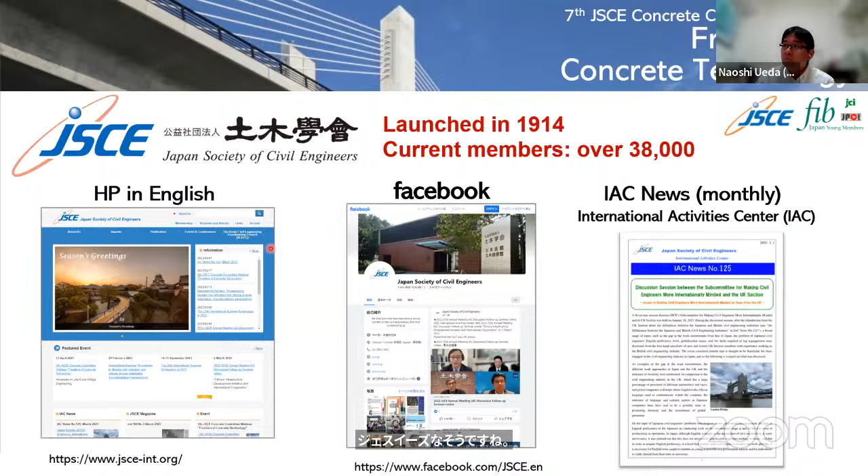JSCE has several research committees. The Concrete Committee, to which we belong, is one of these research committees. This webinar is one of the activities organized by this committee. The most important activity of the Concrete Committee is to publish the standard specification for concrete structures. The latest version was published just last year, and part of the specification has been translated into English.

Currently, you can freely download it from the Concrete Committee's webpage. The Concrete Committee is also focusing on international activities. We issue a newsletter every month to inform about our latest activities. Moreover, we hold an international web seminar every year, primarily with Asian countries. This year, we are planning a seminar in Laos.

As I mentioned before, today's webinar is our 7th webinar, meaning we have already had 6 webinars up to now. You can watch the past webinars on YouTube. Please search for JSCE and Frontiers of Concrete Technology if you are interested.

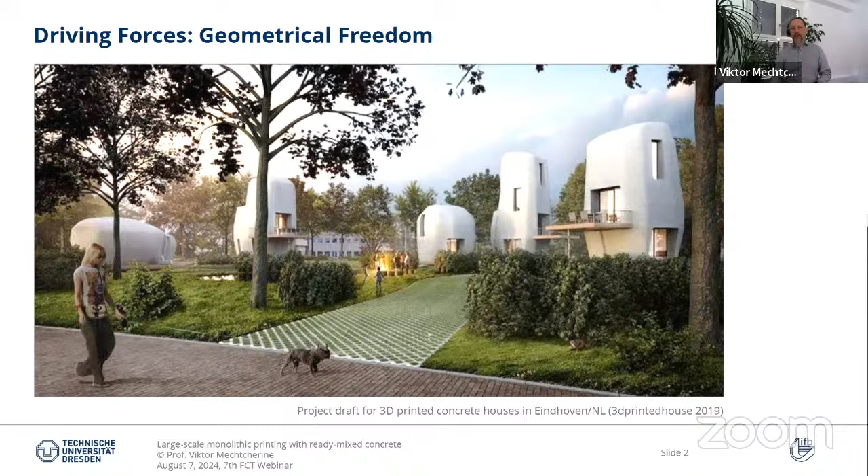Using this technology, we can produce pretty complex geometrical forms without much additional effort, which in case of casting is not feasible. So the second point is we can use this geometrical freedom also to optimize topology, following the principle form follows force, and spare material.

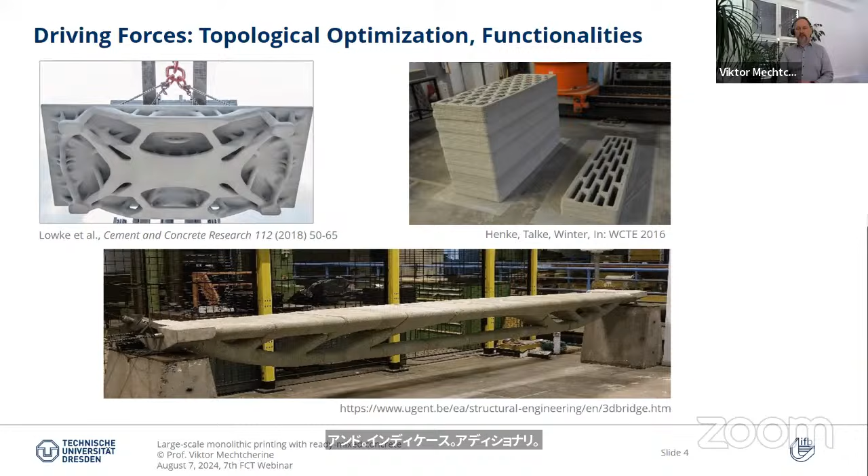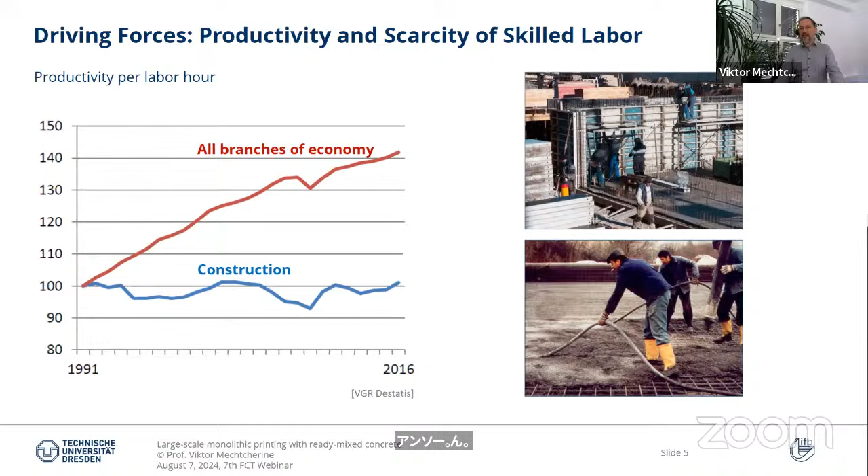The next point is about productivity, and this is even more important. In most countries, productivity in construction is stagnating. In other branches it's developing pretty fast, but in construction it's more or less on the same level as in the last decades, mostly because of the high portion of manual labor. We also have less and less skilled labor on the construction site, so it's difficult to find replacements for people who retire.

So it's additional motivation to use robots and machines. Given that the price for such robots goes down while salaries for labor go up, the motivation is increasing, so we're interested in using this technology more and more, also from the economical perspective.

I believe it's much more efficient to send this data from planning directly to the machine, from digital planning directly to digital fabrication without any loss of data. It would also make the entire process more robust and efficient.

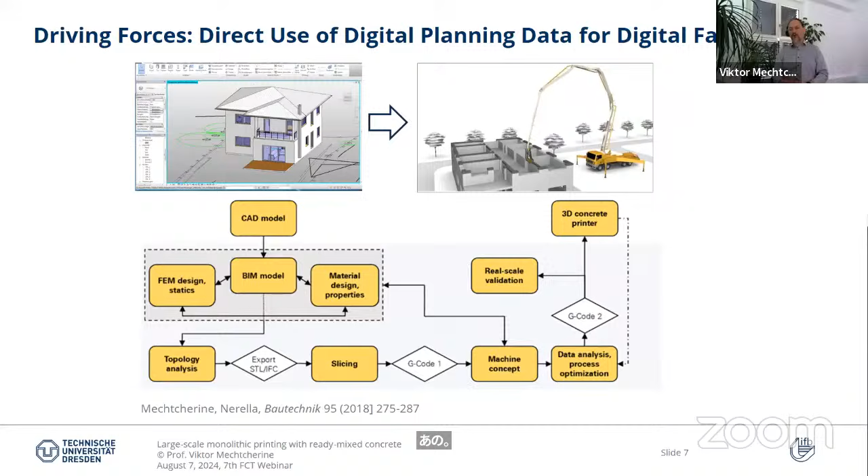So this was a little introduction, and now I want to address one of the technologies widely used in 3D printing nowadays: extrusion-based concrete 3D printing. We use extrusion as the key component for shaping the filaments. There are other techniques as well, like spraying, but today I'll concentrate only on extrusion-based printing because it's the main technology.

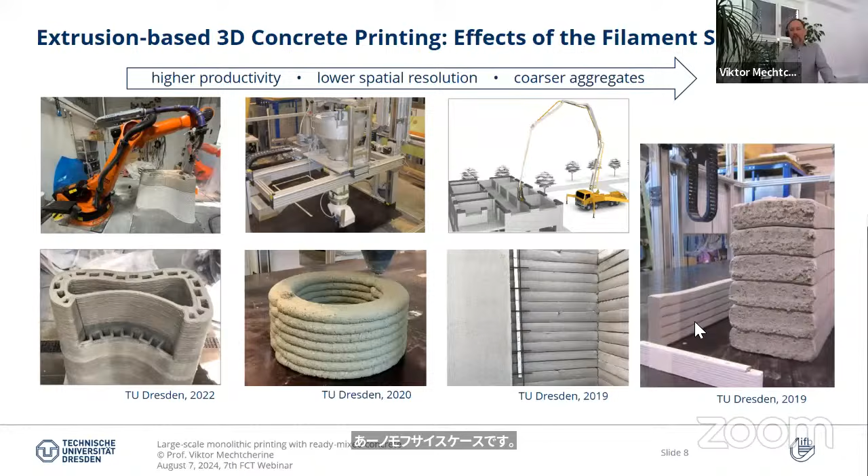Good, so recognizing these benefits, we suggested already a couple of years ago an approach we called Conprint 3D. Conprint 3D stands for on-site monolithic 3D concrete printing. We offered this approach during Bauma in Munich, the largest fair for construction machines worldwide, and we were awarded an Innovation Award.

The idea those days wasn't much of an idea yet—we hadn't built a machine. It was just a concept, but a pretty sound one. I'll show you that nowadays it's also implemented, so indeed we have applications of this concept in the practice of construction.

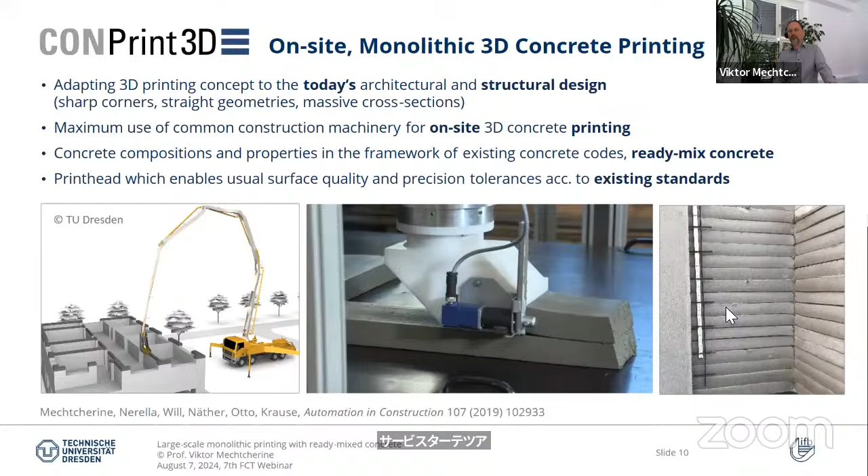On the other hand, we want to use to the maximum extent the machinery which exists already, and we want to print on site and not in the factory. Another important point is we want to use ready-mix concrete, which spares costs and links to existing standards. So you see here some scheme as we started our thinking process, and the first printed element in our lab.

We have here a little video. I hope that it works.

So this was a presentation of this concept during the fair, and you see it's still quite schematic, but basically the most important points are shown here: it's at a large scale, it's on site, and it's using existing mobile pumps.

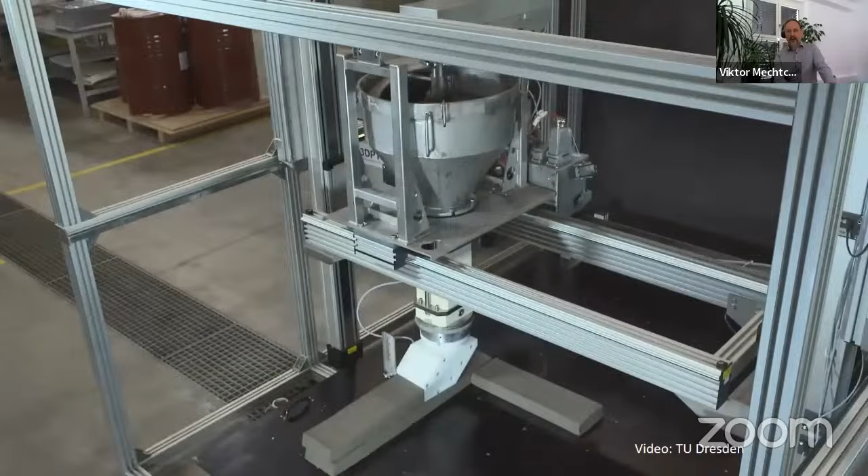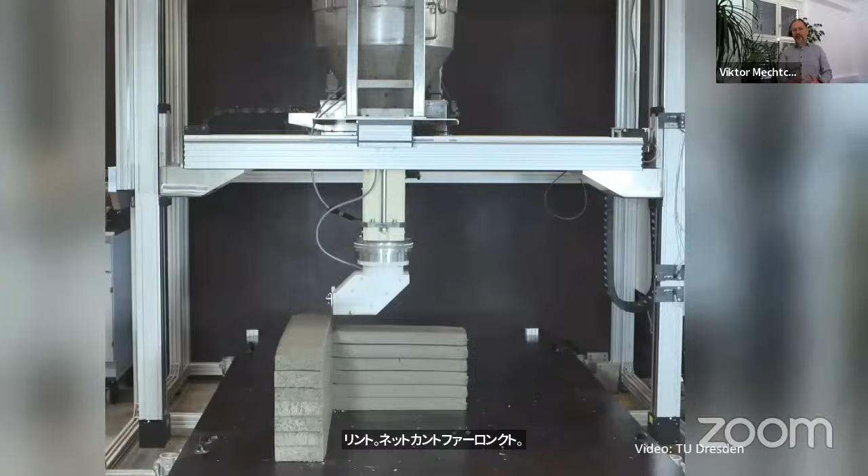And then we follow this concept. So we built a large print head and installed it first in our lab on a gantry system, as you see here. You see that it's a little bit different than other types of printing. It's kind of long bricks we deposit here, and we can also form sharp corners and produce a geometry similar to masonry.

So now, after showing the concept, I want to discuss with you what we need to successfully implement this concept in the practice of construction. For this, we need a material which complies with the requirements, and I will address this right away. On the other hand, we need an appropriate machine.

I addressed this mobile pump as a base machine, but it's not all. We need, of course, also an appropriate print head and maybe some other devices for steering the machine. And of course, we need software for transferring the planning data into the data we need for execution of this job on the construction site.

So let me start with requirements for concrete. Obviously, we first need to deliver concrete from the ready-mix truck to the site as such. So we use this pump, and we need to pump the material to the print head. Then in the print head, the material needs to be extruded, so it should be extrudable. But first, it needs to be pumpable.

Extrudability implies that we have a particular deposition rate of the material, which is also arranged in a way that it complies with the printing speed and movement speed of the print head. And when material is deposited, we want, after a while, to deposit another layer and another layer. This is what we call buildability, so that material which is earlier deposited can carry the load of subsequent layers of material which come after.

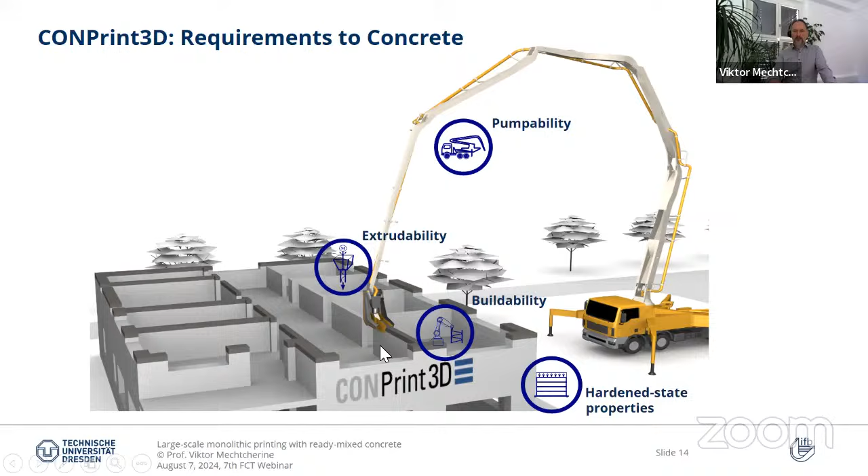And finally, when the structure is printed, we of course also require some properties in the hardened state according to standards, and I will address this as well. So let me start with pumpability.

Here it's very important to understand that we actually have a very complex process. The complexity is defined, first of all, by the heterogeneity of concrete. So when we push concrete in the pipe, we have some segregation. We have formation of a thin lubrication layer, as you see on the walls of the pipe. The properties of this lubrication layer define the resistance of concrete against moving in the pipe and also the energy we need to apply to let the material move.

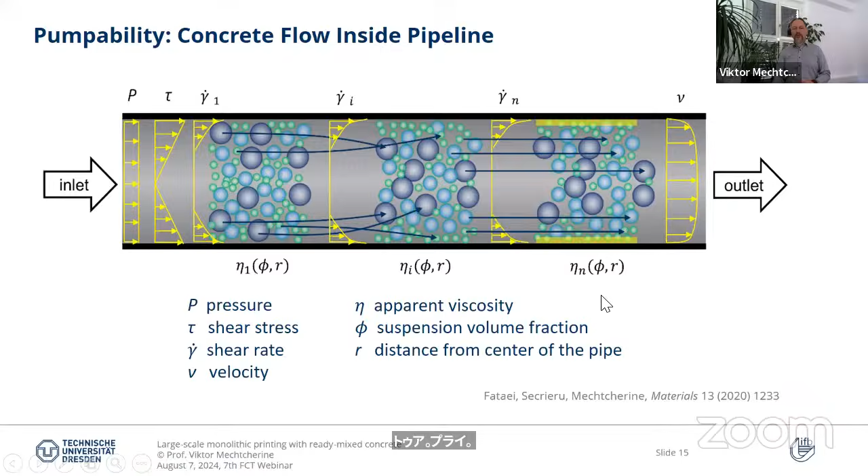For this reason, we need to actually characterize the material, and then when we have these values, we can also predict what pressure we need to apply in the pipeline to achieve a particular flow rate in the pipe.

Then we measure the resistance to this sliding by installing a sensor in the lower part of the device. We can change the weights we apply to the pipe, and we can also change the speed of the movement. So we can get a relationship between flow rate and pressure from this experiment.

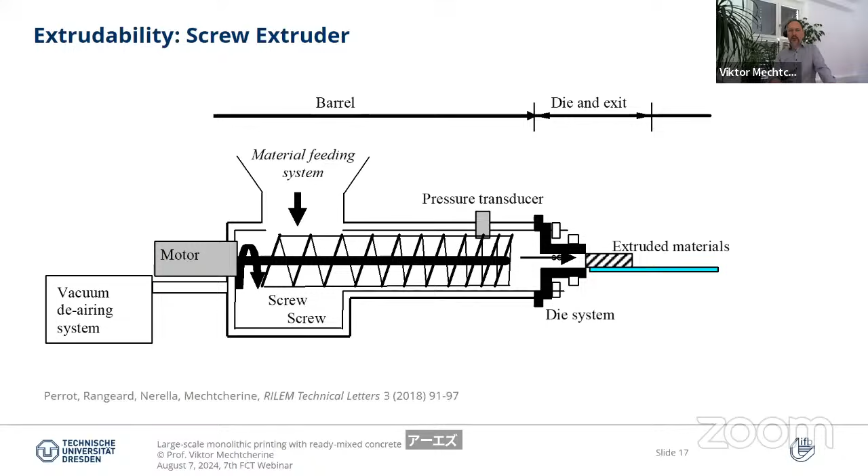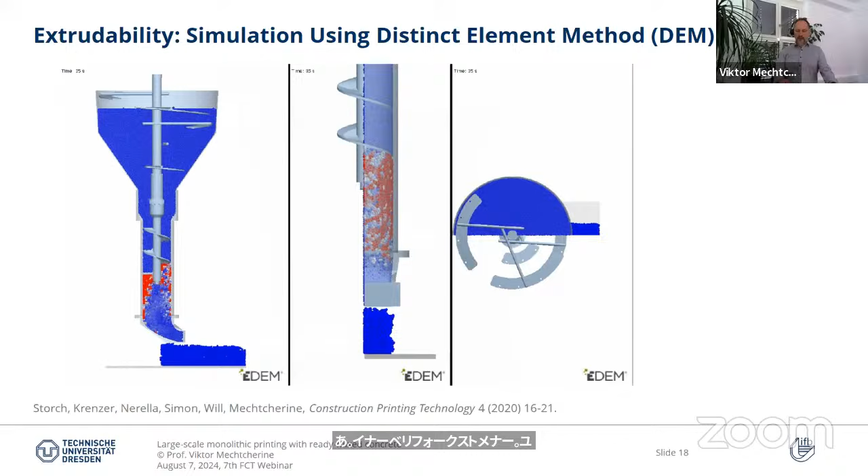So what we do to gain more insights, we go into numerical simulation. We use distinct element methods, which is very appropriate here. And you see from this simulation that we can look inside this kind of print head and see some unsteadiness maybe in the flow or some concentration of forces. This helps us to develop in a very focused manner new designs of the print head, but also adjust the rheological properties of the material we want to print.

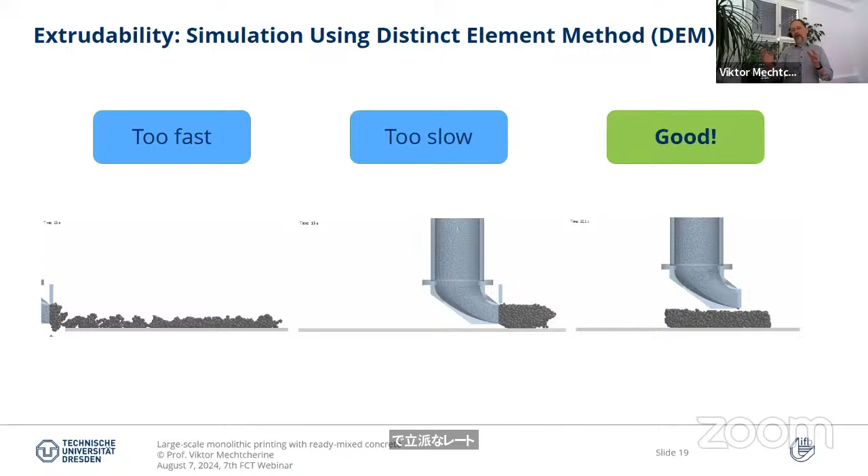So I have here an example where different deposition rate is shown. Actually the flow rate of the material is the same, but the print head moves with different velocity. And you see here what I mentioned before, that it's very important to adjust the deposition rate of the material to the speed of the movement of the print head.

So at the end of the day, what we can suggest is that for every extruder attached to this kind of mobile pump or any other equipment you use in extrusion-based 3D printing, you best measure inline the energy which you need per unit, volumetric unit or weight unit, of concrete extruded. That's the first thing. Then you have this relationship between the extrusion rate and the energy needed for a specific device, but you also look at the quality of the concrete coming out of the nozzle. It should be a steady flow without any interruptions.

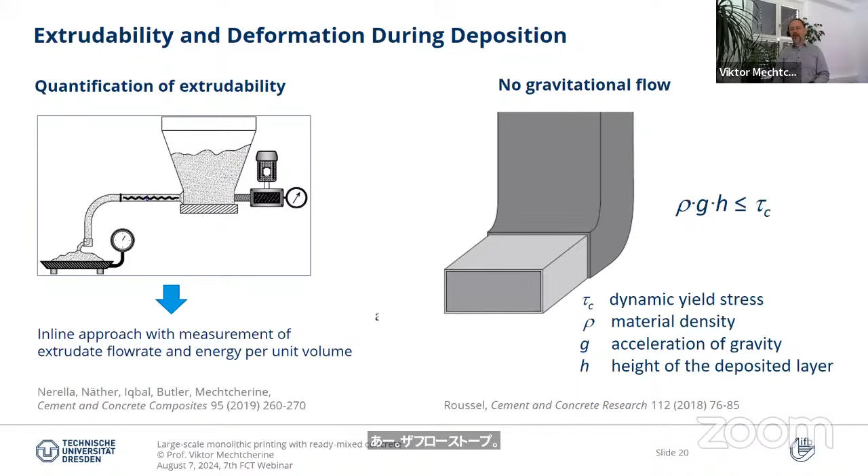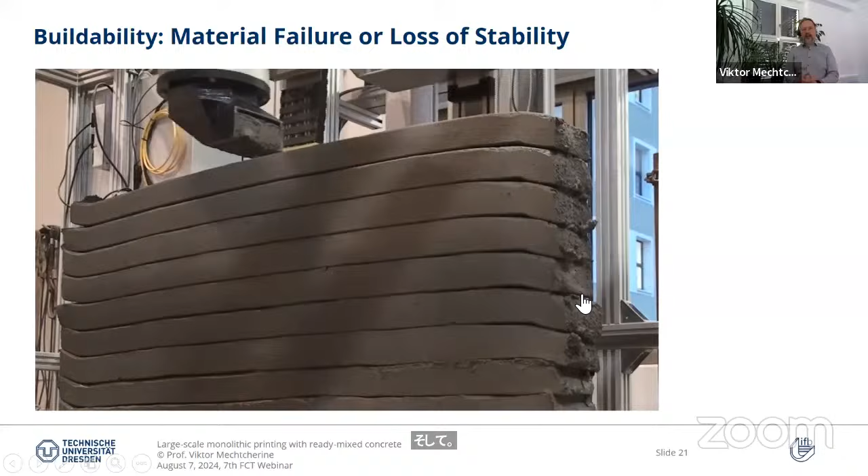You probably noticed that in our approach, we try to keep the shape of the nozzle so that we have very good control over the shape of the element, since we also use pretty large filaments in the deposition. So this is an example from the lab. In this case, it's already about buildability. So we look at what would be the limit when we place layer by layer material, and how well we can predict the failure of the material if the build-up process is pretty fast.

And this is done here, of course, on purpose. We want to see the failure so that we can check if the prediction works well. And there are two types of failure. On one hand, it can be material failure, so that the layers further down, on the lower side, are kind of overloaded by the many layers which come after.

You see that the formula is very similar to what I showed before. Just the difference is that the height here depends on time. So the height is not the height of just one layer, but of all the layers which come during the minutes and hours of the deposition.

And of course, in time, the resistance of the material will increase. So we know this concrete changes its rheological properties over time. We call it thixotropic behavior. And what you see here is an extension of this term by a thixotropy constant, and again we have time here.

So we can measure this development using different devices. Basically what we want to gain is this relationship between the static yield stress, shown here, and the age of the material after deposition. In the first hour or 1.5 hours, it's mostly a linear relationship, which is of course good. But then due to hydration it becomes non-linear in most cases, strongly non-linear, and then we need to use a non-linear relationship if we go that far.

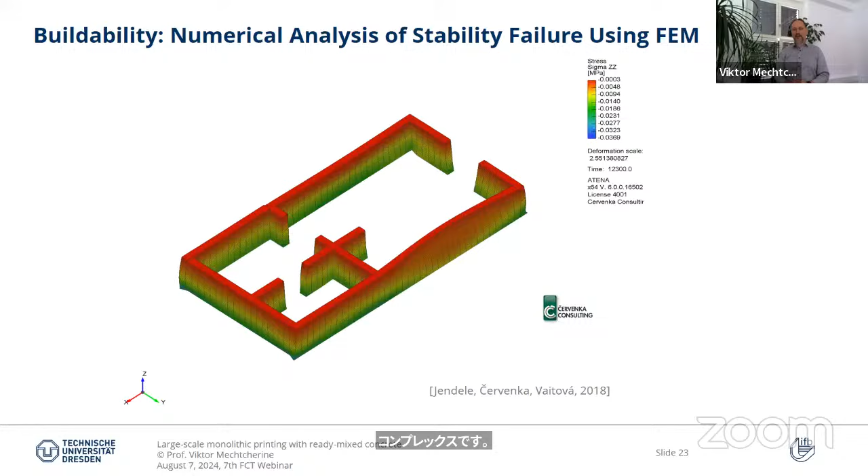So for simple elements like this kind of wall, there are analytical formulas you can use, but for more complex situations, where you have shapes which cannot be translated easily into analytical formula, then we recommend to use finite element analysis.

Now I come briefly to material design. Actually, it's not rocket science, but first of all we need to attain these rheological properties which I mentioned. And when we go to a real concrete, ready-mix concrete, we recommend to follow the approach by Andreasen and Andersen, which is sometimes also called the Fuller form or curve. It's a similar approach which enables us to get maximum density packing.

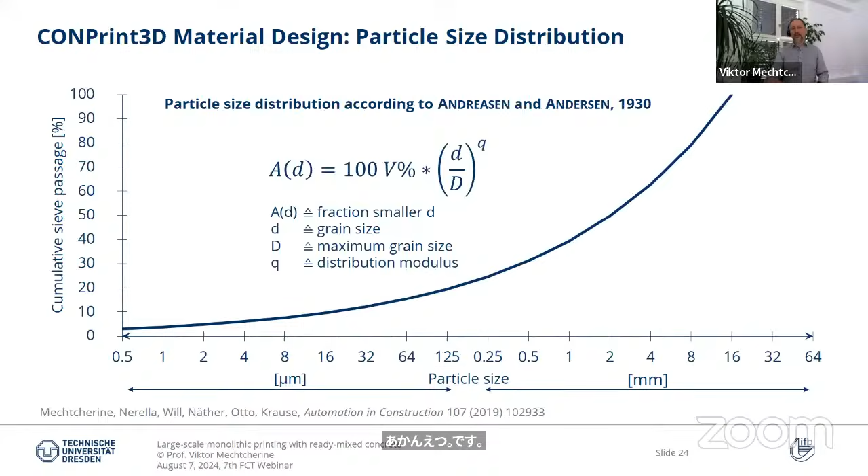And how to get it? You probably all know this. It's about choosing the ingredients for the mixture in a way so that, by applying some quantity of these different materials—and we start already with cement, not just with aggregate—and then in this case some pretty fine powder, so stone powder here, limestone powder, etc., and then we have two different sands, and then we go to larger aggregates.

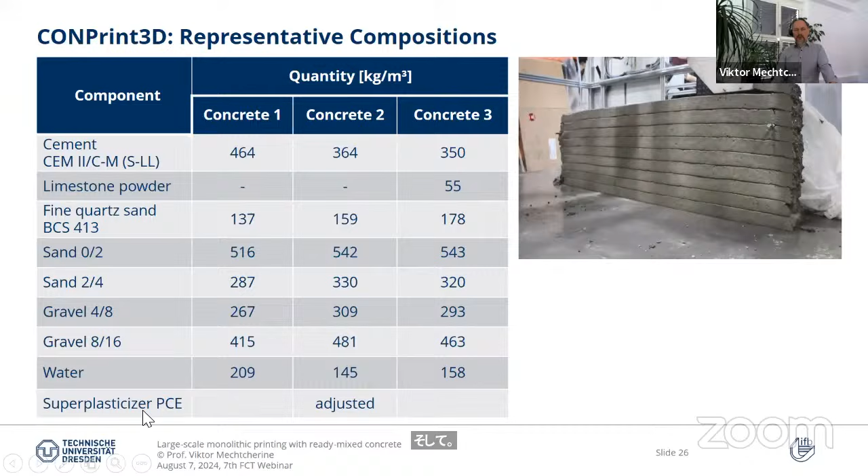You see that in this case we could match the shape of the curve pretty nicely, and this is what we recommend to everybody. In this case, we can indeed minimize the cement content while still keeping good extrudability, pumpability, and also buildability. So again, you see some examples here, and we also use some amount of superplasticizer, just to achieve the rheological properties as required.

So now very briefly to hardened concrete. When we print material, after a while it hardens, and of course we need to know what properties we achieved. In this case, it's really important to figure out in which direction we need to test. Basically, we have here some heterogeneity and anisotropy due to the joints, as you see here. So the joints are usually a little bit weaker than the rest of the material, the bulk material.

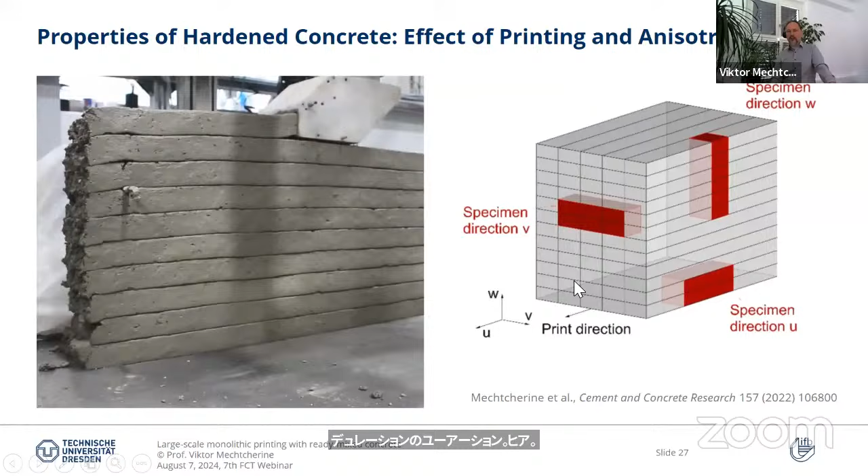And if you have many filaments deposited one aside the other, you might also need to take specimens in this direction. In this case, two directions are fine: the direction of printing, shown here as direction U, and direction W. So for these two directions, I'll show you some results.

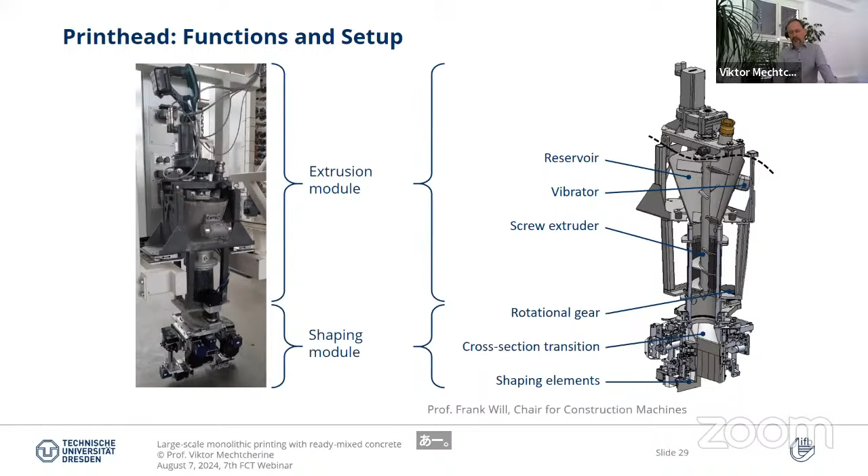Let me say a few words about the print head. You see that the print head consists of different portions. In our approach, we use a reservoir as a buffer, and we also have a possibility to vibrate the concrete a little in this reservoir so that it flows better into the screw extruder. The screw extruder delivers it to the shaping elements, which can make the filament a little wider or narrower, and we can also change the height of the filaments.

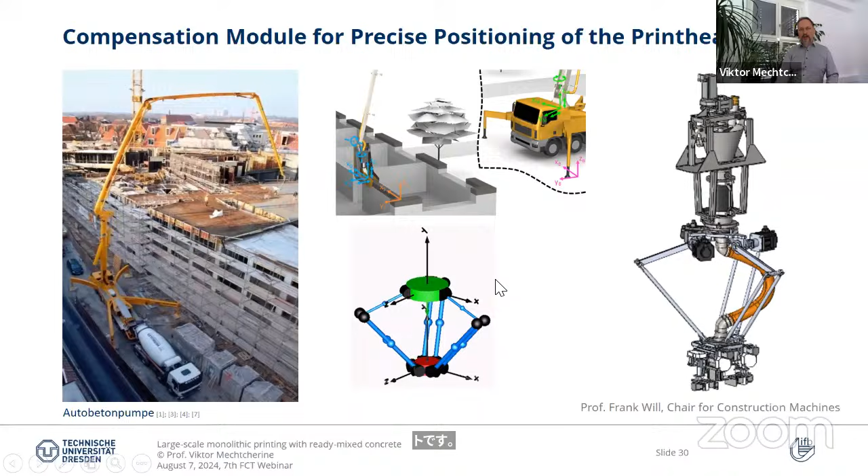A very important point is that given the large size of these mobile pumps, you can imagine, and probably know from your own practice, that it's pretty soft. So at the end of the pipe where the concrete is delivered, there's quite a large movement of the pipe due to the pumping process itself, but also due to wind, etc. So there's a need to adjust the position of the print head. This is the approach we suggested, to have some adapters which enable us to compensate for the movement of this mast.

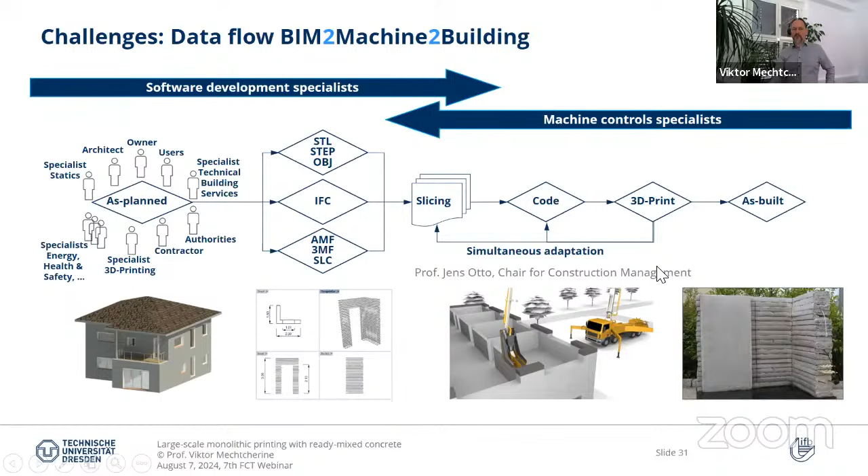This is what we are working on quite intensively now: collecting information during printing by laser sensor concerning the geometry of individual filaments, but also using photogrammetry to collect data of the printed structure. We also introduce sensors to collect even more information, for example on temperature and other parameters, ultrasonic measurement, etc. So now I come to the promised implementation of this approach in practice.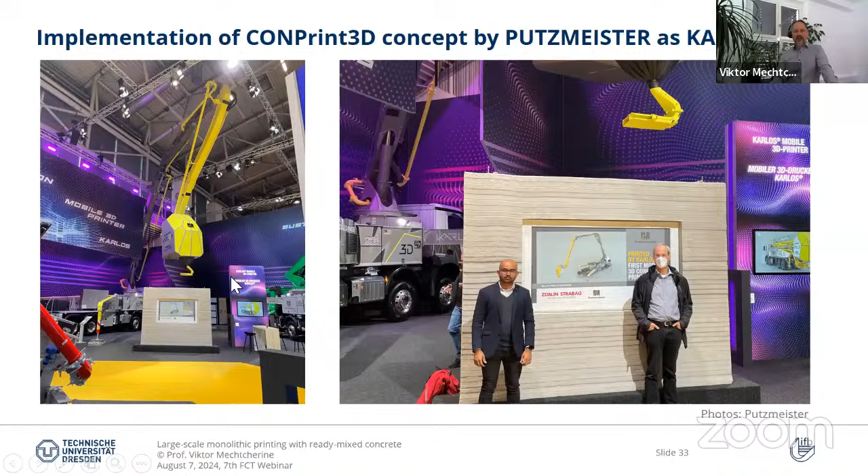We collaborate with the firm Putzmeister, a German producer of concrete pumps. This company learned about our approach, liked it, and implemented it. This presentation was last year at the same fair in Munich, where we got our award a couple of years ago. So after 6 years of working on this, they presented the machine.

And this is some data. You see quite a good outreach of the machine. The layer width can be up to 30 centimeters, layer height 6 centimeters. The print head is not very fast at the moment, but they are working on increasing the speed. There are some other parameters. Basically what you see in this box, kind of hidden, is also some adjustment—this system to adjust the position of the print head—but they don't want to show it, of course.

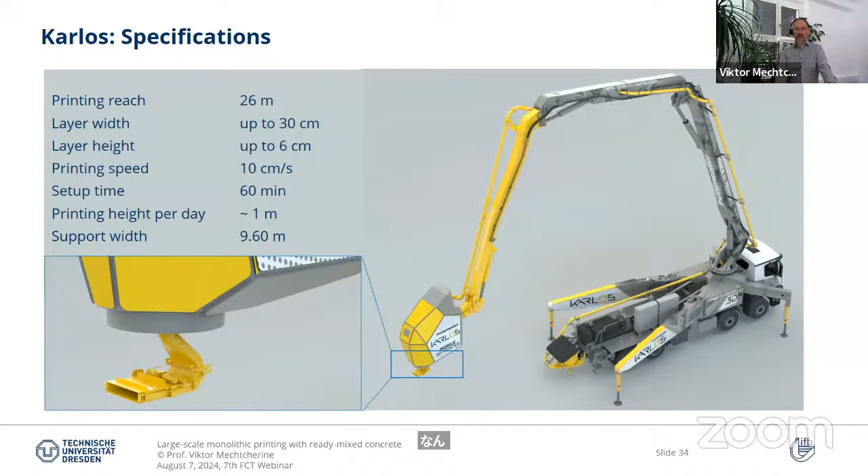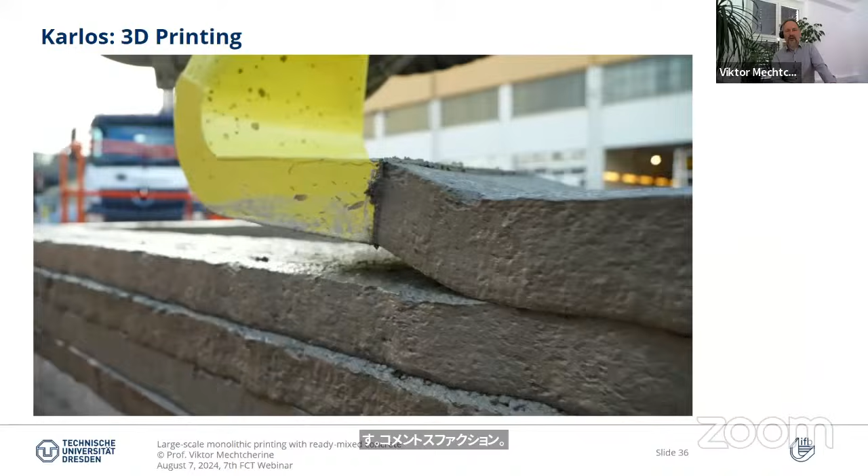This is the recent video of printing. This was the first commercial structure printed here in Germany, near Stuttgart. It was for the Züblin company.

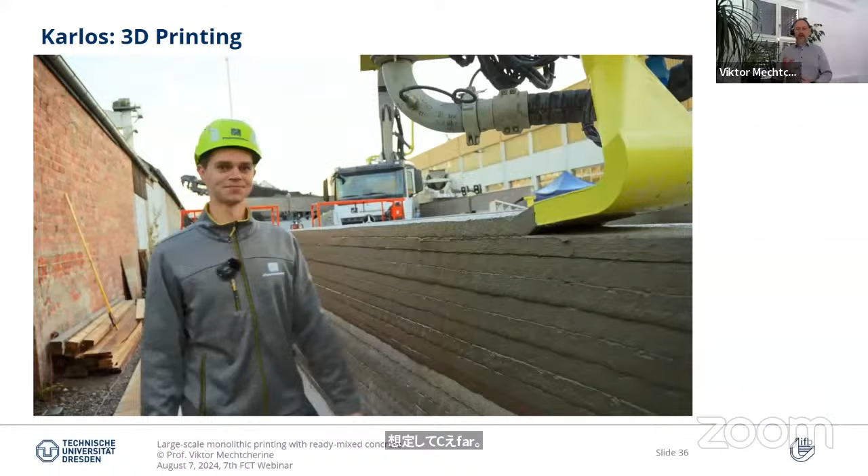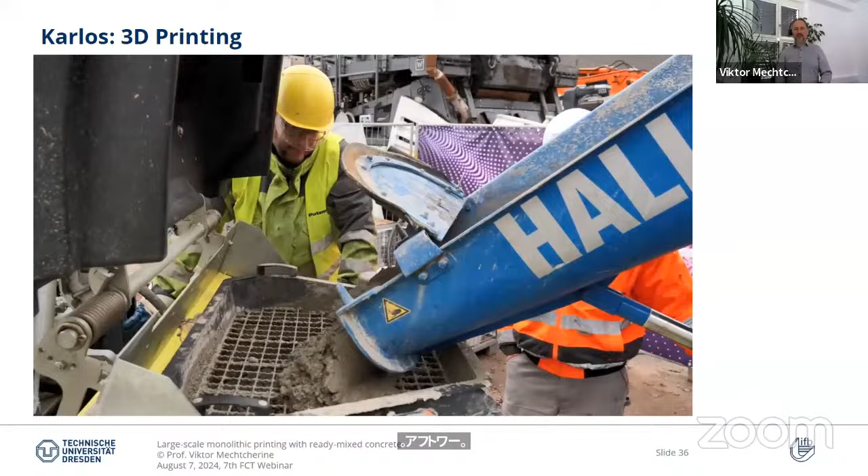And you see here a little bit of material testing, just to check if we are in the expected range. And you see how it works—it deposits layer by layer, pretty wide. After a while, the complete building is built. You see here also delivery of concrete. It works in the usual way, as if you would pump this material just into the formwork. But in this case, it's not placed in the formwork, but deposited layer by layer. This is what we call 3D printing.

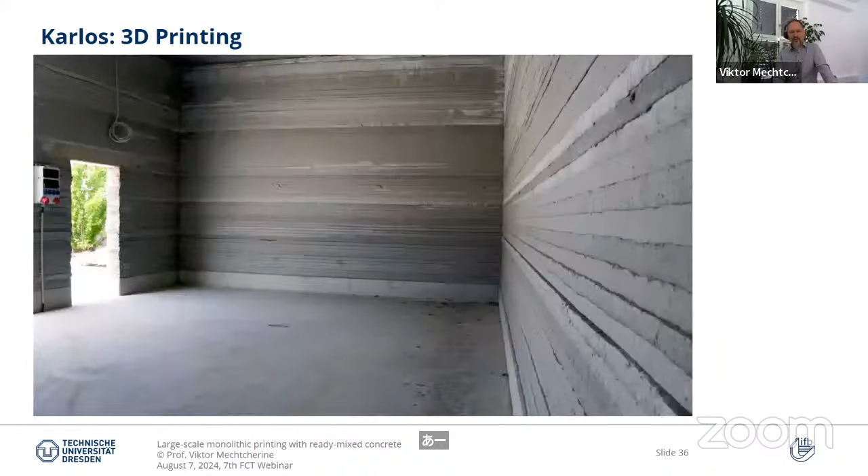So this is what was produced. It's nothing huge, but it's a considerable geometry already—6 by 10 meters in projection, and a height of approximately 4 meters.

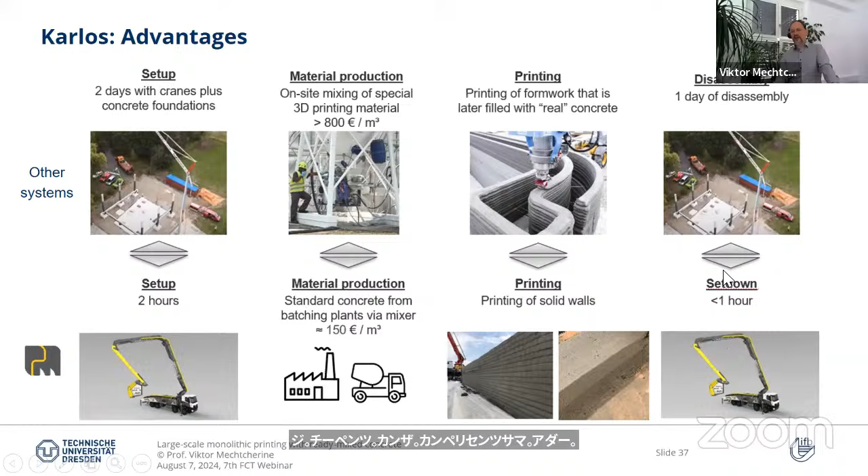Good, there are some advantages. It can be set up on the construction site pretty fast. The material is pretty cheap in comparison to some other materials offered for 3D printing. And then the printing process itself is pretty fast, and the setdown of the procedure is also pretty speedy.

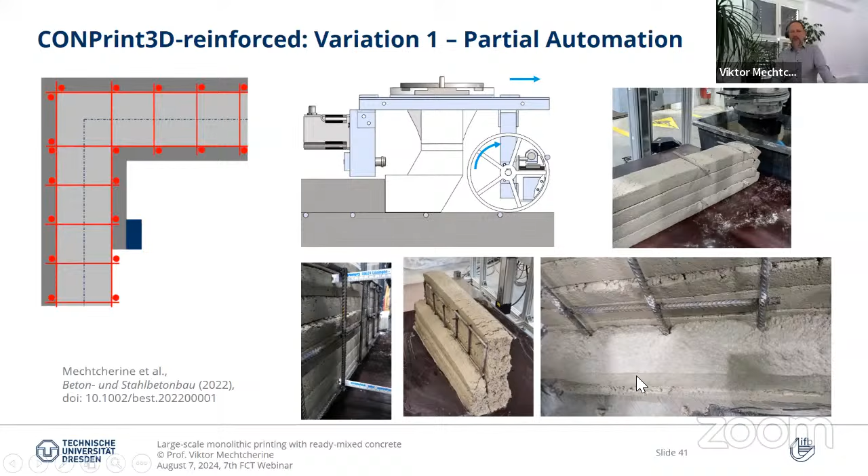We have also developed a little machine for that, and you see how it looks after overprinting. Then some images showing this positioning from the side. This is all still on the lab scale at the moment.

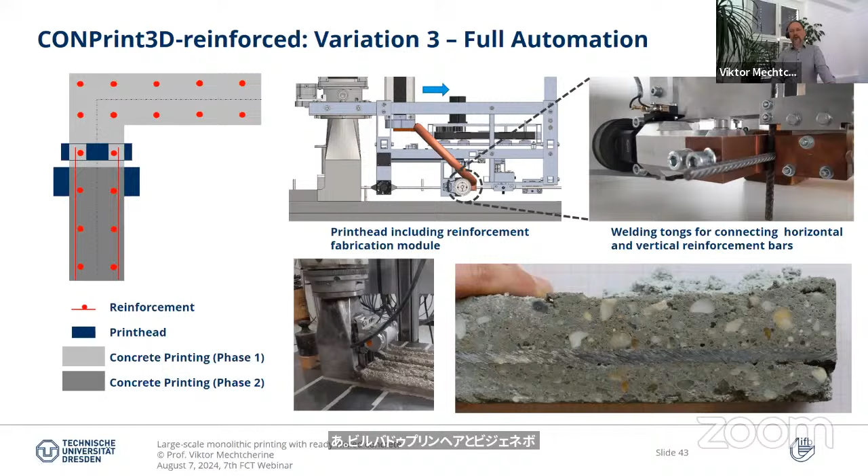This is all for today from my side. Thank you so much for listening, and of course I will be happy to answer any questions.

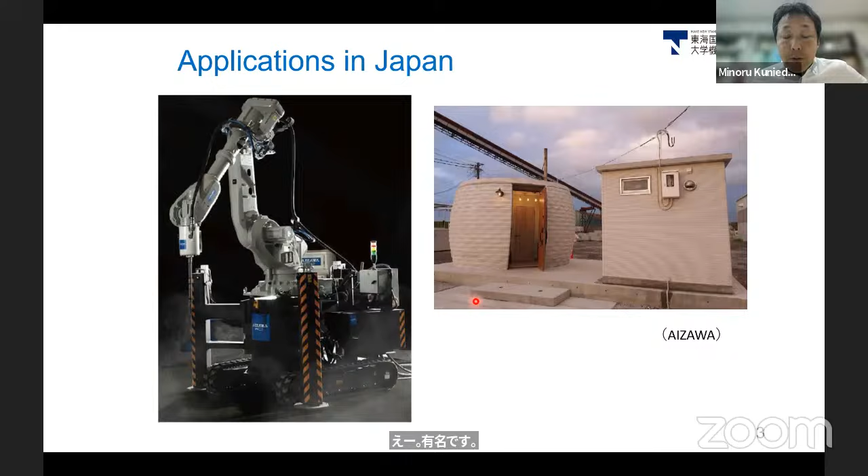I will show you some applications in Japan, provided by the Aizawa Corporation. You may know these photos, a small house for a toilet, and a bench printed by the 3D concrete printer with very interesting topology. The plan and design were conducted by a student at the University of Tokyo, and now they are used at a station for JR East.

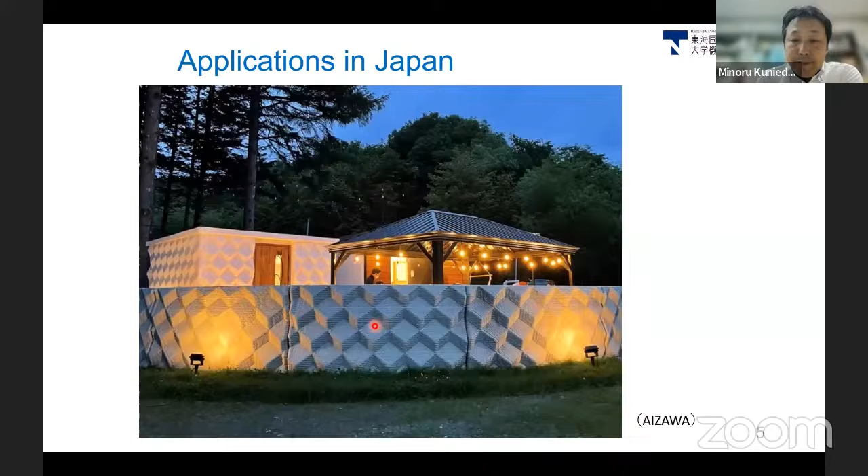This is a nice photo showing a nice facade of the architecture and the wall. This is also a nice facade with lighting, and the 3D concrete printing texture is well used in this building.

This is a nice architecture, a small house - I'm not sure of the usage of this building. But again, the formwork is printed, while the inside or core member is cast using UHP-FRC.

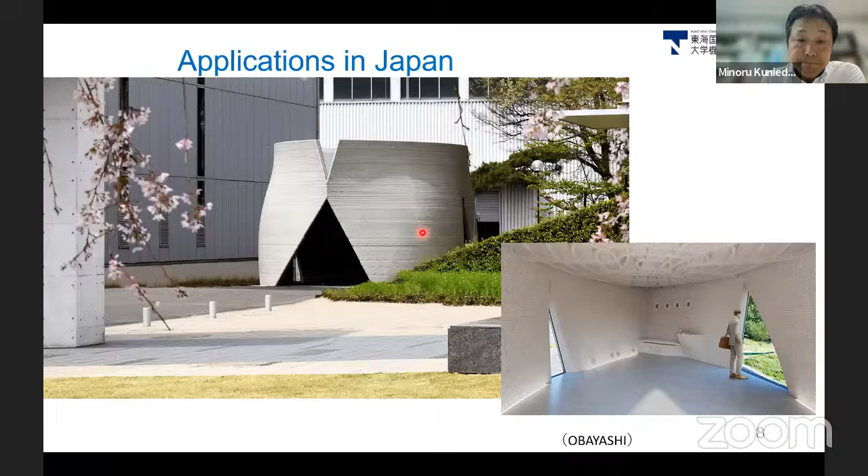And this is a recent trial by Taisei Corporation. As you can see, the foundation is a very complex shape. So they measured the 3D shape of the foundation, and then printed considering this gap. As you can see, this nice printed structure is possible. Probably they'll try to use it in tunnel structures.

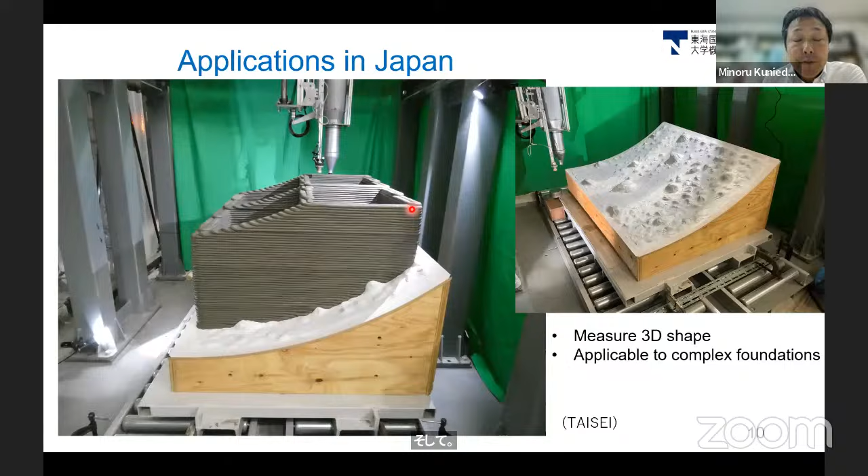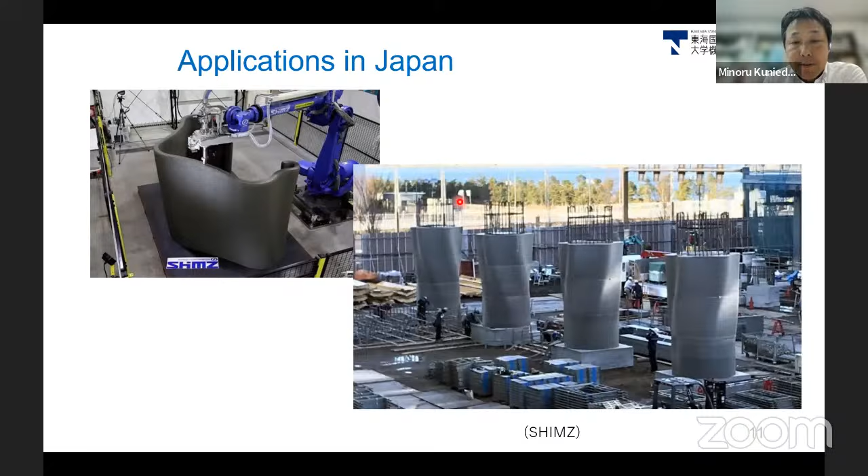So the next application is provided by Shimizu Corporation. As you can see, this is also the formwork for huge buildings, and the formwork was printed by 3D printers. And this is the precast members, so they construct on site and then cast the ready-mix concrete inside of the formwork. They also built a huge gantry-type 3D printer, and made these kinds of wall structures by 3D concrete printing.

So in Japan now, many companies and researchers try to use 3D concrete printing technologies. Today I would like to show you some feasibility studies related to the batching and mixing works in 3D concrete printing, which is just one component of the technology. The second aspect is confirming buildability during the manufacturing process, and also we try to know the failure process of the printed members in flexure. I will show you these three topics briefly.

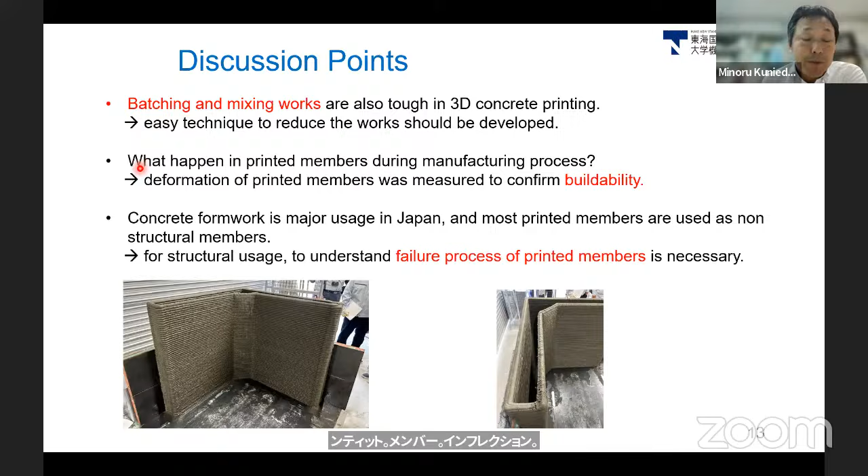As you know, we can see many figures and videos for the printing process, but before that, most printers use mixing in addition to batching, right? Unfortunately, ordinary mixing and quality control, such as slump flow measuring, have been adopted. In this case, advantages of 3D concrete printing may be lost because much work is needed during the mixing process.

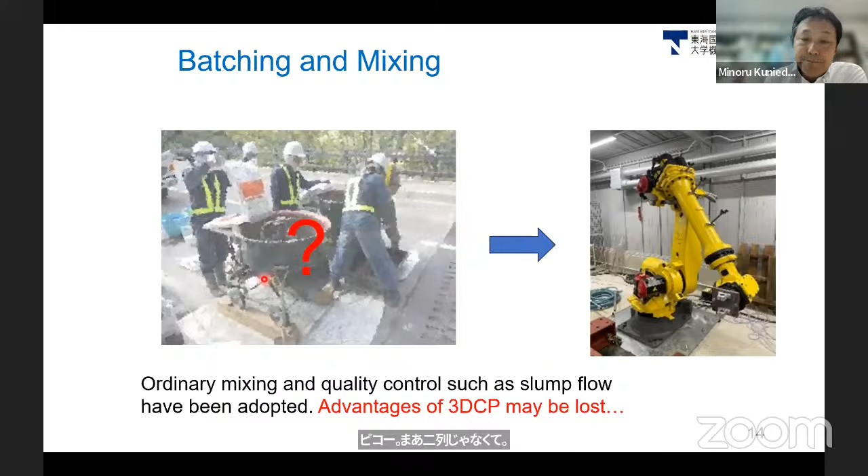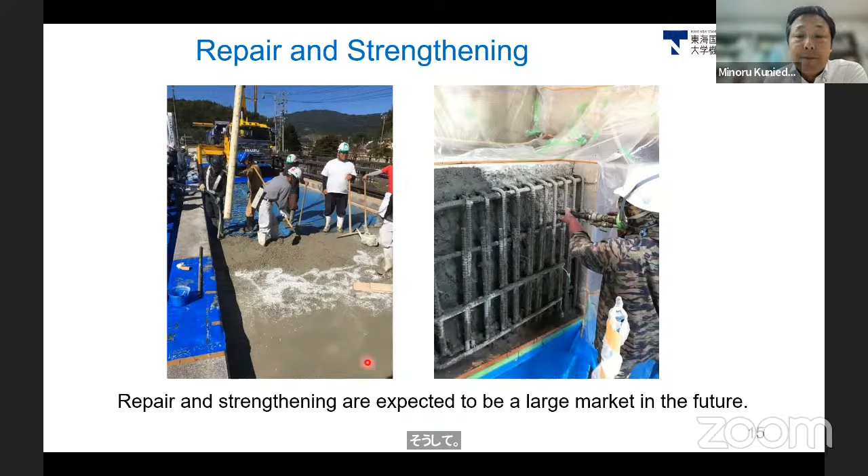And after that, safety on-site is one of the key issues nowadays. So we have to consider that automated casting of concrete should be used, and it may be useful for recovery from disaster damage.

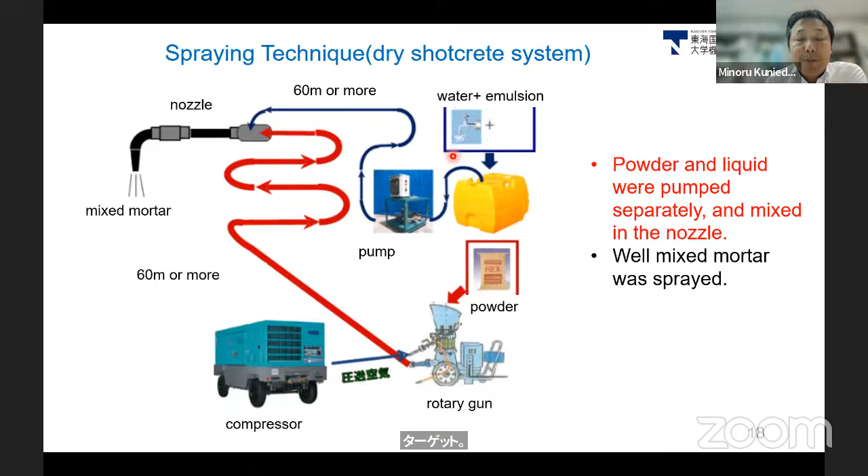So we try to develop an on-site shotcrete printer covering the issues I showed before. The key technology is the spraying technique already used in the tunneling method. Powder and liquid, including emulsion, are pumped separately to the mixing nozzle, and those materials are well mixed within the nozzle. Then the well-mixed mortar is sprayed onto the target—so no separate batching and mixing process is necessary.

Through this technique, compressive strength is very easy to gain. This is the relationship between compressive strength and tested age. After one month, 60 megapascals is obtained, so the compressive strength is enough to use as structural members. And the interlayer weakness significantly observed in extrusion printers does not exist here—meaning a more homogeneous material is obtained.

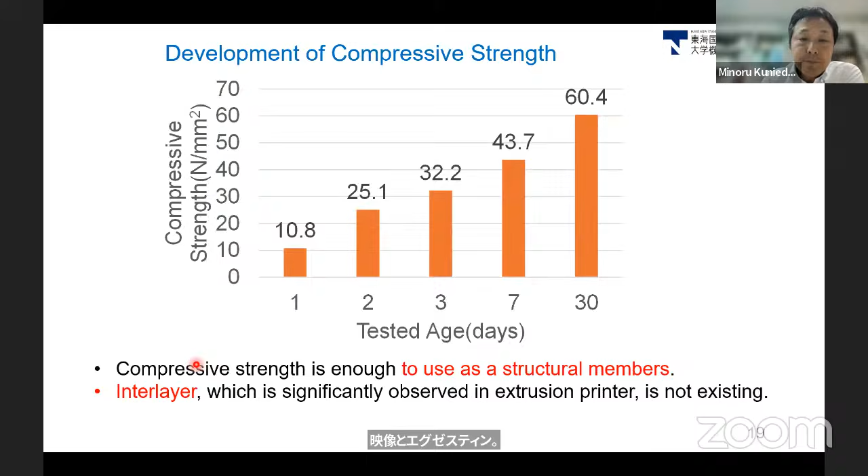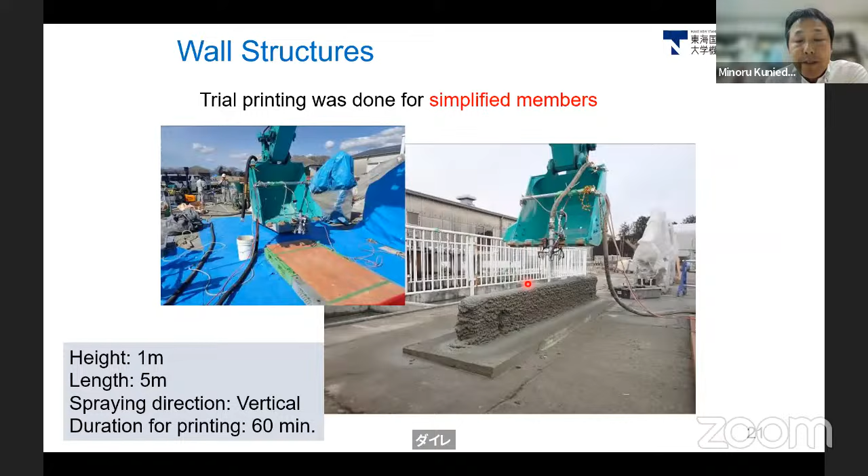That trial printing was done for simplified members, because the backhoe is programmed but not appropriate for complex members and shapes. The first one is just a wall with a straight shape, height 1 meter, length 5 meters, with vertical spraying direction as you can see. The duration for printing was only 60 minutes.

We also try to use this technique for concrete formwork for a column, but unfortunately, behind the reinforcement we need a mesh to catch the spray material, so this is not so appropriate, in addition to issues with surface treatment.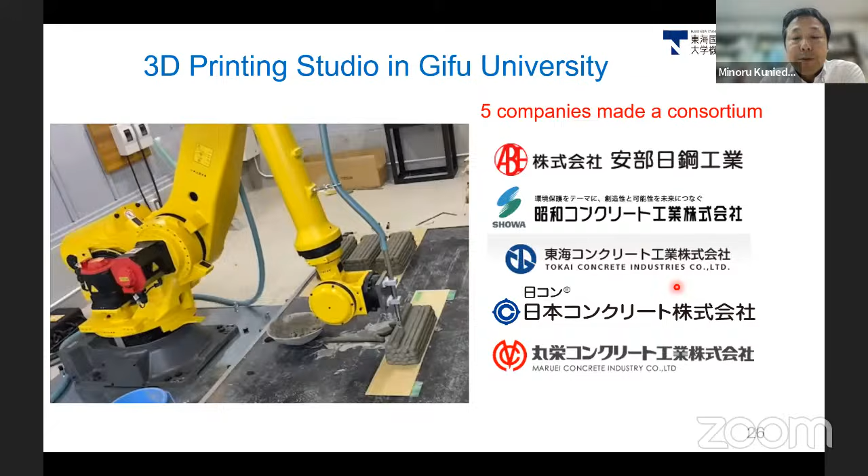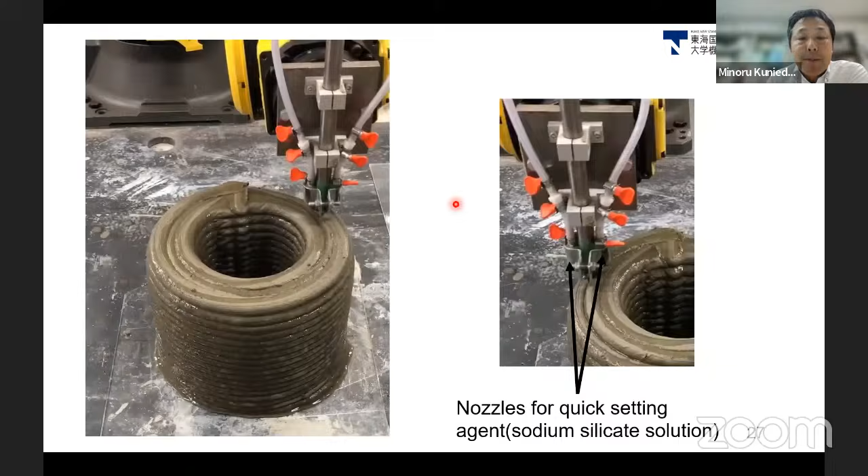So in our system, we use the nozzle to provide the quick setting agent just next to the nozzle for the material, because in an ordinary system, sometimes the quick setting agent has been mixed with the mortar already, or added just before the nozzle. But we might have some risks for the pumping, so we just sprayed it onto the filament directly.

And using this system, we try to measure the deformation of the printed members during the manufacturing process, because we should know the buildability of this printing system.

So in our lab, we attached the laser displacement transducer to the nozzle, and then measured the distance between the filament and this transducer. As you can see, the zero value is equal to the design value, which is just the target for the printing, but a negative value indicates lower than the design value due to the sink of the printed layer.

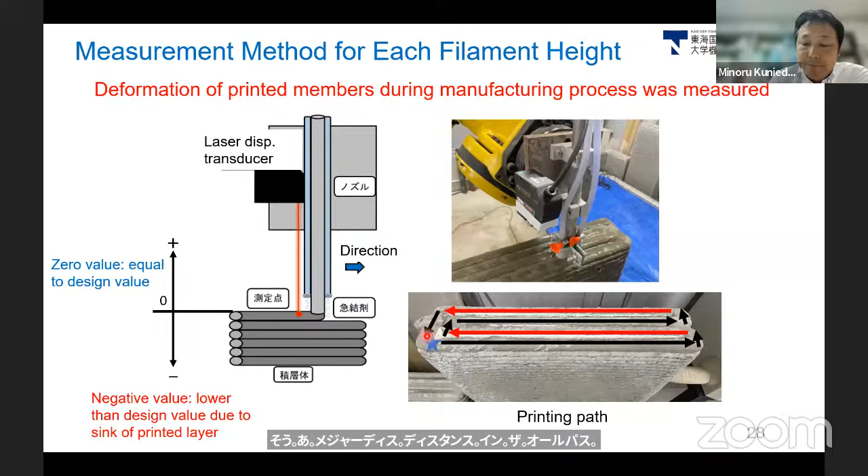So we were concerned about the sink of the printed layer, and we measured this distance for all the printing paths. So this is just the result of the measurement.

This wall structure is made using a mortar with a flow value of 140 millimeters. This is the appropriate material at this time.

So I show three graphics: the result of the bottom face, the middle-bottom part, and the middle part near the top of the wall printing. Initially, the measurement result value shows almost zero, but after 3 layers, a negative value was observed because in this phase the above layers are pushed onto the bottom layers.

And the bottom layers have lateral movement from the original positions, because we have the interface between the steel plate and each filament. So the friction or deformation due to the pushing has been observed here.

But in the middle part or top part, no change has been observed. Finally, the negative value improved back to zero, because there is no loading from the above layer at the top of the walls.

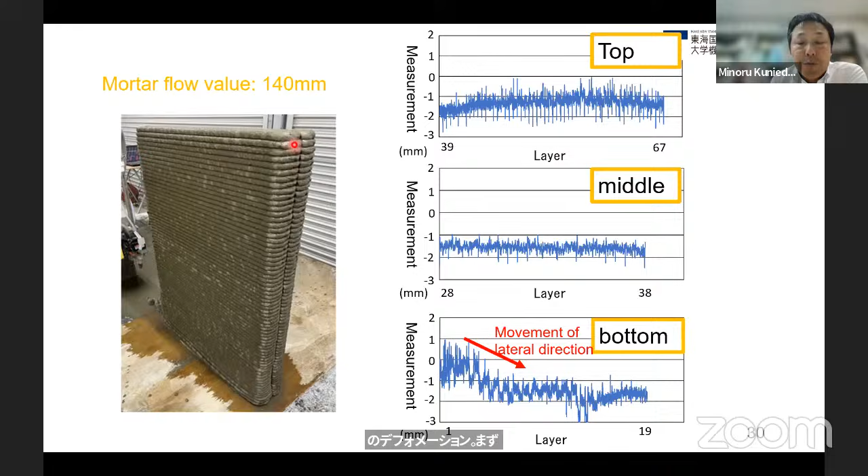But as you can see, with the stiff mortar, no deformation was observed toward the top of the wall.

And I will show you the third topic: the flexure failure behavior of reinforced printed beams.

We made the beam specimens using the 3D printer. The printed mortar has a water to binder ratio of 32.2%.

An additive with fly ash has been used for the mix. The beam size: length is 2,150, height is 195, and width is 96 millimeters.

The specimens include one with reinforcement and one without. In the case with reinforcement, we terminated the printing after 3 layers, put the reinforcement in by hand, and then continued printing. As mentioned, the sodium silicate solution was sprayed onto each filament.

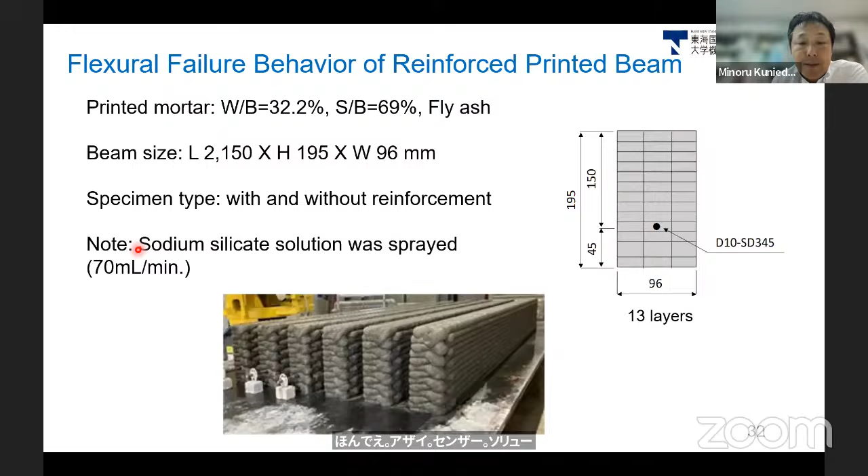This is just the material properties of the printed mortar: a compressive strength of the mortar of 86 megapascals, and the yield strength of the reinforcement is 392 megapascals.

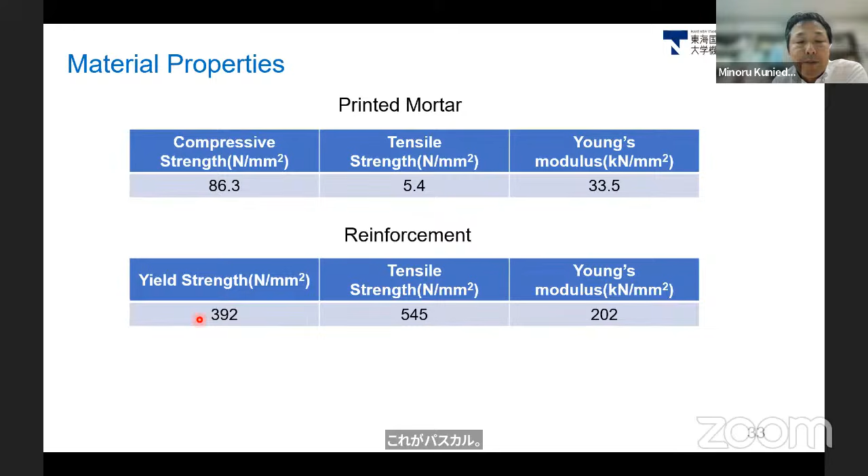And this is the relationship between the load and displacement for the beam with reinforcement. As you can see, we obtained the ordinary response of reinforced concrete, with initial cracking, then yielding of the reinforcement, and finally compression failure.

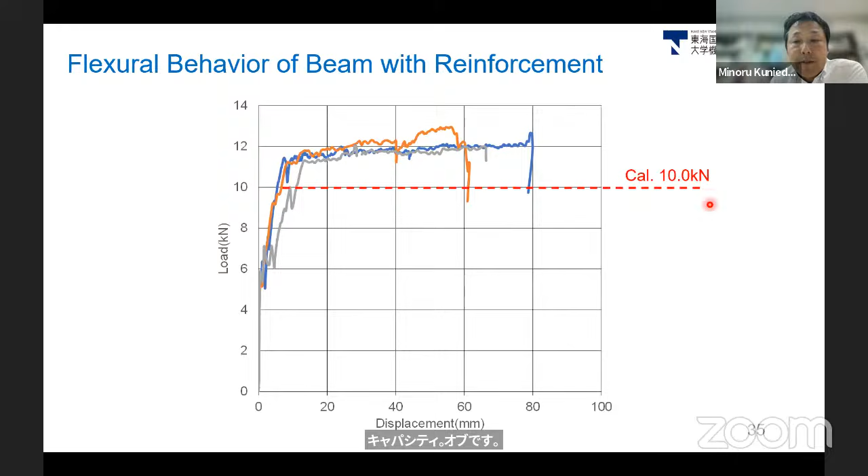The estimated capacity of this beam is 10 kilonewtons, so it was well estimated.

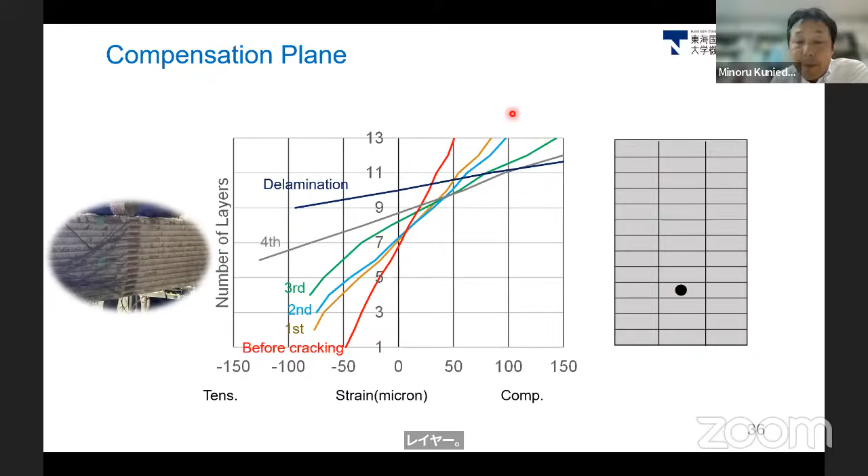Fortunately, in this series, this crack pattern does not significantly affect the loading capacity, as you can see in the load displacement relationship. But in some cases, or in the future, we have to consider that delamination of the interlayer may affect the compressive failure in addition to the bond behavior of the members. So we should be concerned about crack patterns within the printed members, or hopefully control the crack pattern within the same conditions.

So this is just information on the compressive strain at the top layer. As you can see, we have over 2,500 micron or more in the final stage, sometimes not reaching 3,000, because we may have delamination of the interlayer at the top layer.

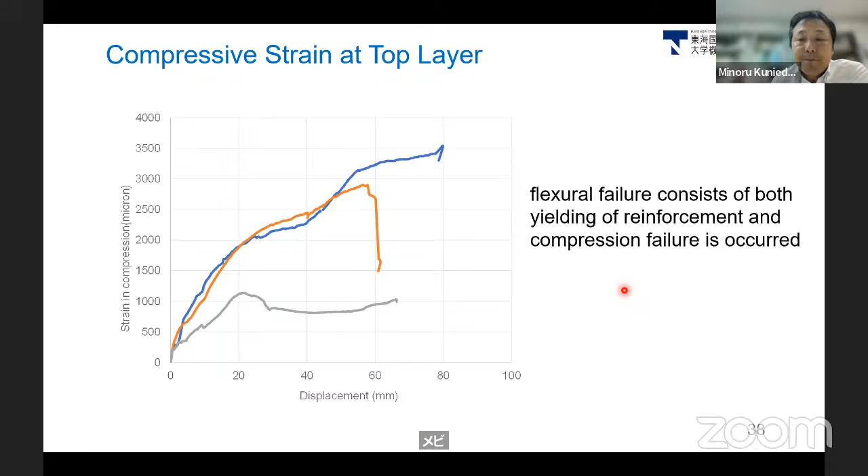In beams under flexure, delamination at the compression zone may reduce the ultimate load, and we can imagine that. In addition, weak bond strength induces a splitting crack by ring tension around the layer. So we should improve the interlayer properties when we use this as a structural member.

So I would like to conclude my presentation. It is necessary to reduce the amount of work required for batching and mixing to enhance the advantage of 3D printing. So the dry spraying method is one of the effective methods for this purpose.

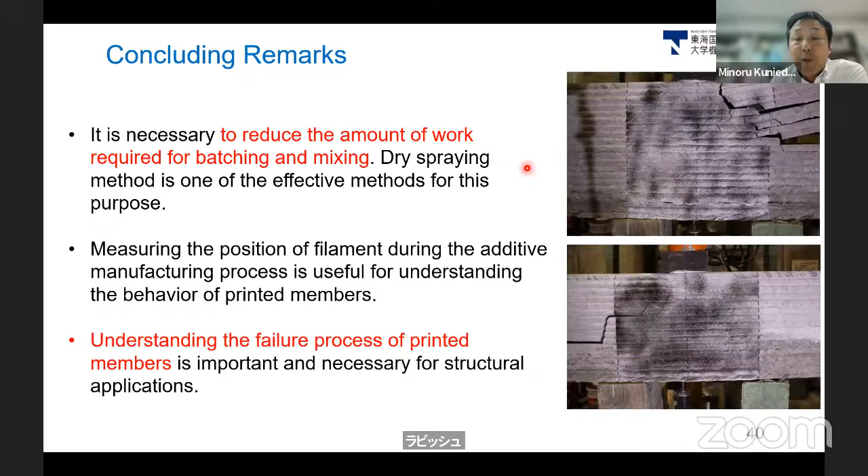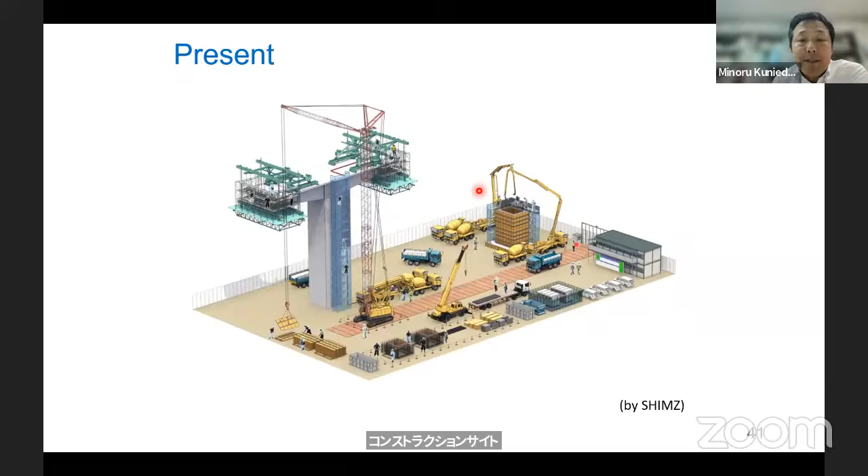This is provided by Shimizu Corporation, and this is an image of a present construction site for a bridge. There are many tools and machines in the construction site. By 2030, some parts have been changed to use drones, robots, and precast systems, something like that.

But by 2050, remote work has become dominant in controlling machines at the construction site.

Finally, I would like to inform you that a JSCE guideline for the design, production, and construction of structures with 3D printed formworks is being developed now, chaired by Professor Ishida of the University of Tokyo. I also contribute to that work, and probably and hopefully it will be coming soon. So please refer to this document, and I hope it will be helpful for your work. Thank you for your kind attention.